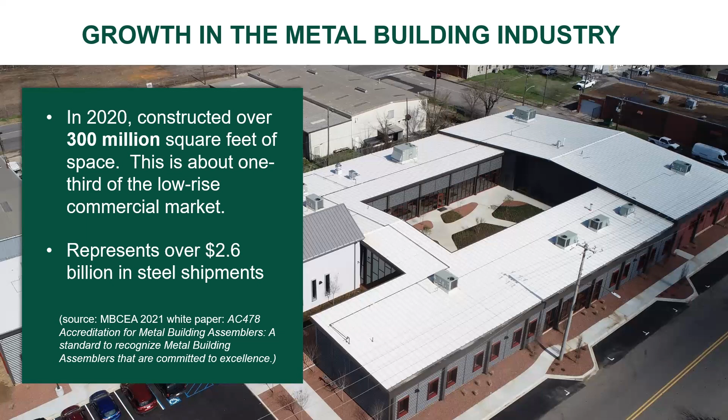So in the past, as we know, metal buildings were relegated to construction of things like warehouses and airplane hangars. But today, due to lower costs, energy efficiency, sustainability efforts, and design innovations, metal buildings are trending everywhere, from car dealerships, schools, churches, strip malls, you name it.

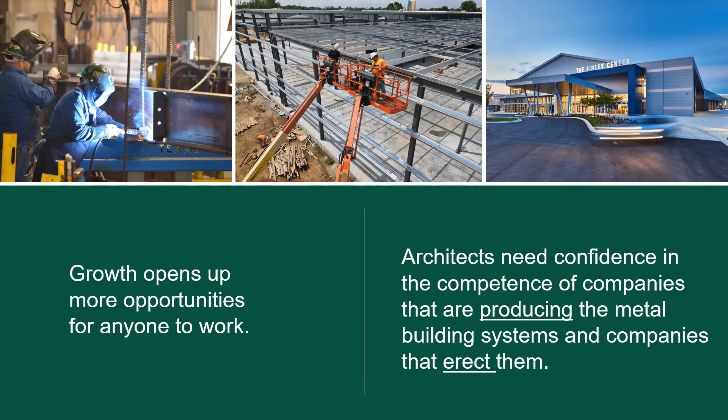This growth has really opened up more opportunities for anybody to come and participate in this work. You, as architects, need the confidence in the competence of these companies that are producing the metal building systems and the companies that are erecting them as well. This is where accreditation comes in, because accreditation will ensure that the metal building construction industry has a high standard of best practices that promote safety, training, quality, and consistency for the manufacture and assembly of the metal building systems.

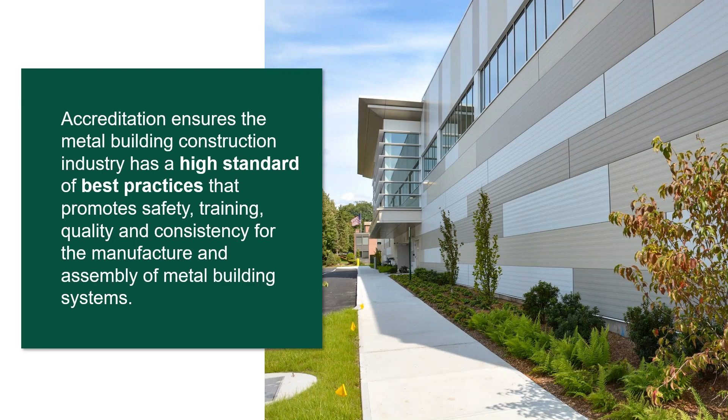The metal building industry has worked with the leading US accreditation body, International Accreditation Service, IAS, to develop a system which includes these 2 accreditation programs we're going to be talking about today. These 2 programs are really what sets the bar and independently verifies the competence of these companies.

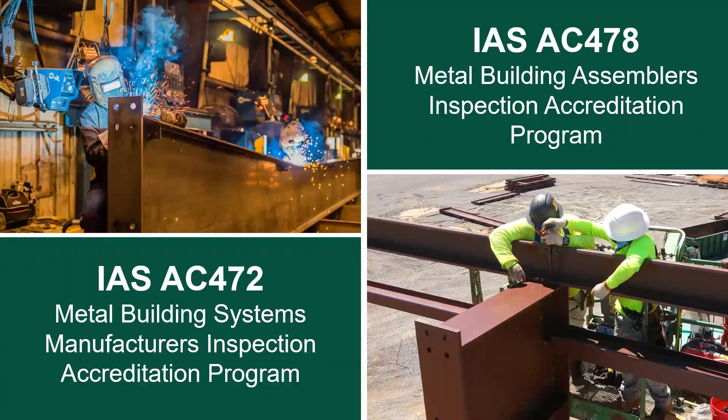The first accreditation program we're going to be talking about today is AC472, and it's for companies that design and manufacture the metal building systems. The second accreditation program we're going to be talking about, AC478, is for companies that construct and erect or assemble the metal buildings themselves. So a little bit of background about us, IAS.

IAS is an independent, nonprofit, internationally recognized accreditation body that is regularly evaluated for compliance with international standards by peer accrediting organizations worldwide. We have over 18 accreditation areas, everything ranging from testing labs, inspection agencies, fabricators, metal building manufacturers, metal building assemblers, and many others.

IAS must comply and operate to the requirements of ISO/IEC standard 17011. This 17011 standard specifies requirements for the competence, consistent operation, and impartiality of accreditation bodies assessing and accrediting conformity assessment bodies.

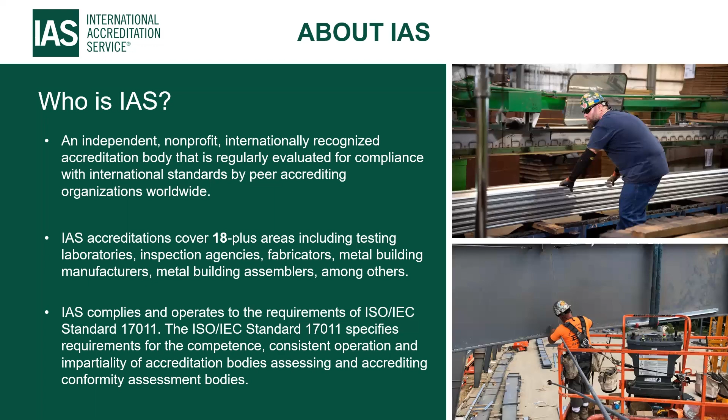IAS is also a 501c registered body and a wholly owned subsidiary of the International Code Council known as ICC. I'm sure many of you are already familiar with ICC because they are the leading global source of model codes and standards and building safety solutions that include everything from product evaluation, accreditation, technology, training, certification. These ICC codes, standards, and solutions are used to ensure safe, affordable, and sustainable communities and buildings worldwide.

They're also a nonprofit professional organization and a leader in the building construction industry worldwide with over 64,000 members. So most US communities and many global markets choose the international codes because they've provided the highest level of safety in the world for more than 90 years. And nearly 2 billion people worldwide are impacted by ICC's building safety codes.

So what is accreditation? To give you a little bit of a background, accreditation is defined as the independent third-party assessment of an organization against recognized standards to determine if their processes or services comply with the requirements of that standard. IAS accreditation is used by organizations to improve the quality and technical capability of their services.

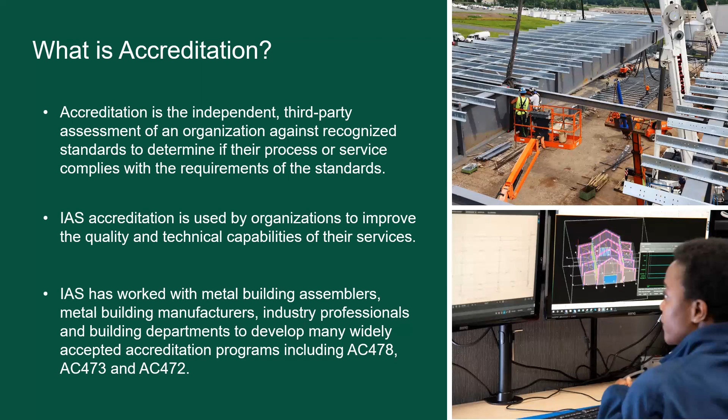IAS has worked with metal building assemblers, metal building manufacturers, industry professionals, and building departments to develop many widely accepted accreditation programs, including AC478, AC473, and AC472. Accreditation with IAS is recognized by federal, state, and local governmental bodies.

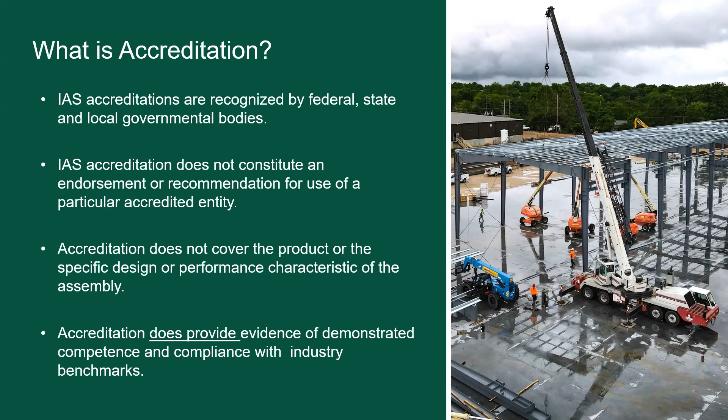What IAS accreditation does not constitute is an endorsement or recommendation for use of a particular accredited entity. Accreditation also does not cover the product or the specific design or the performance or the characteristic of the assembly. What accreditation does provide is evidence of demonstrated competence and compliance with industry benchmarks. And at this point, I'm going to go ahead and turn it over to Walter, who's going to talk about the accreditation criteria. Thank you, Laura, and welcome everyone.

The accreditation criteria, as Laura defined, we developed for each IAS program separately, and it provides guidelines for implementing performance. So when we do an assessment of an organization, whether it be a manufacturer or an assembler, there are several guidelines that are required, and when we come in and do the assessment, we're looking to verify that the organization is following those guidelines and implementing to perform to meet the codes, as well as provide a quality product to the customer.

So IAS assessors use this accreditation criteria, and they're different for each program, but the reference codes and standards that the applicants are seeking accreditation to, we've developed and adopted these through public hearings. And actually, IAS is right now in the process next month of having one of these, where changes get made to these accreditation programs based on somebody wanting to modify something or change it. It goes through this hearing and it gets voted on, and it either gets passed or changed, or it gets rejected and needs further research to see if it really needs to be applied or not. Next screen.

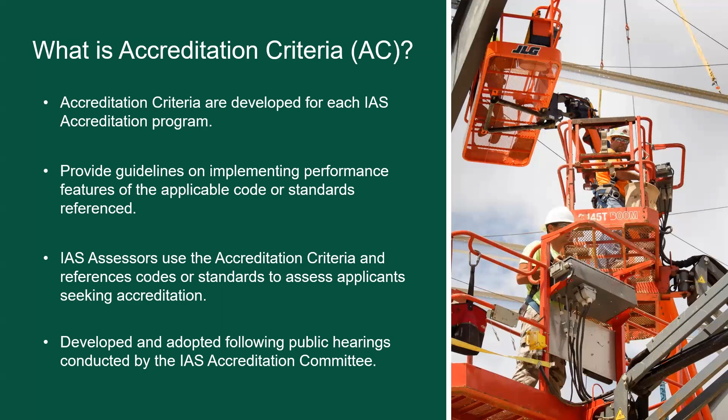So the first one we're going to talk about, as Laura mentioned, is AC472, and this is for the metal building manufacturing organizations, where they actually fabricate from plate or cold form materials to the finished product to ship and be assembled by the AC478 groups. Next screen.

A little bit more about IAS. It's an international accreditation service, and it's a subsidiary of ICC, who produces and maintains all the building codes and requirements throughout the country. And they're based in Chicago, and IAS is a subsidiary of ICC.

The AC472 program was worked together for some time with MBMA, who's the Metal Building Manufacturers Association. Back in around 2000, the same program was followed through with AISC, and in the back of the old steel manuals, there was a quality program for metal building manufacturers. And that's where this started.

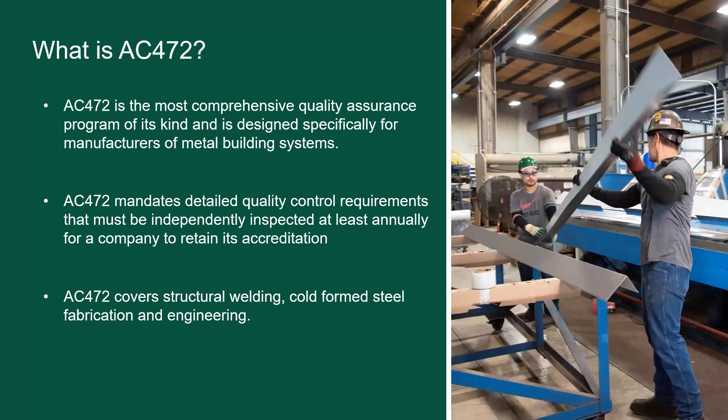Accreditation programs for manufacturers operate under a documented management system. It's clearly defined what is required and how you have to satisfy and meet these requirements. IAS as an agency conducts a yearly inspection. It's indicated to be unannounced, but in reality, they're announced a couple weeks in advance just so that the assessor doesn't get to the manufacturing facility and everyone's on vacation or out of the office.

So they do know we're coming, as well as there's a management system that the manufacturer has documented that tells the assessor how they do things, how they follow the procedures, how they document them, how they keep records. And this procedure or quality manual tells us how they do it, so we know what they're supposed to be having as far as record keeping and documentation.

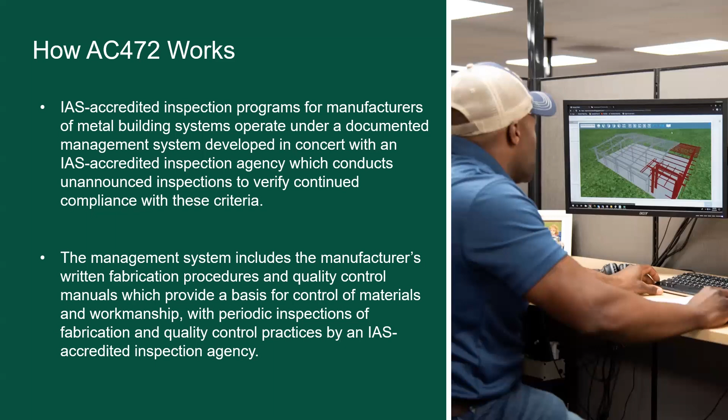As well as IAS doing this assessment on a yearly basis, they also have to hire a third-party inspection agency that comes in twice a year and inspects their work and documentation and record keeping. So they actually get assessed 3 times a year, once by IAS and twice by the third party. What are we looking for?

Order documentation. The metal building manufacturer gets an order, usually from a builder or an erector that's buying it for a customer. So they tell the manufacturer what they want: building size, width, length, eave height, roof slopes, canopies, facades, whatever else they're wanting, panels, what kind of panels, insulated or just plain, and insulation.

Design and detailing to ensure that the code requirements through engineering are maintained. Engineers have training records, they've got education, they have programs that are designed and used properly. The raw material that's being used is required to be traced for type and grade to ensure that the product is being made from the right material.

Quality assurance programs and staff are licensed engineers and certified welders and inspectors. So every organization has to have a certified welding inspector within the organization that is checking 100% of the welding, and the licensed engineers are licensed in the states where the projects are going so that they can sign and seal them to ensure that they're done properly.

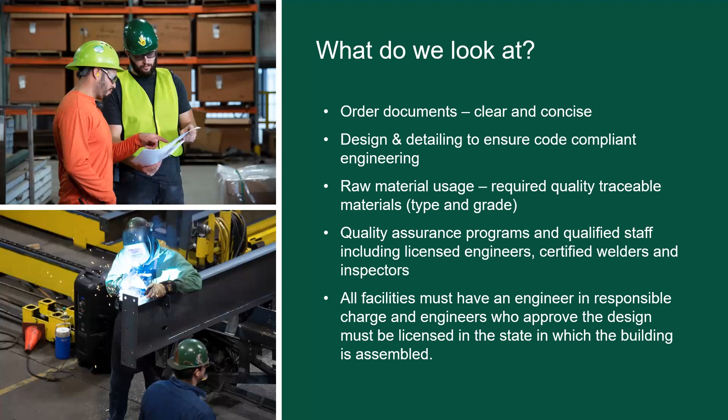And in addition to that, there is an engineer in responsible charge, and they'll have several engineers, both licensed and unlicensed, that are designing jobs, and they're all getting approved through a licensed engineer for the state in which the building is being assembled. Next screen.

The benefits to the architects. The architect and owner have confidence that the building's adhering to the most comprehensive quality assurance program, and that it's being done properly with people that are trained, with the knowledge and experience, as well as the procedures being followed and traced, and can verify that it is being done properly by the right people.

Each accredited manufacturer's got to demonstrate specific and detailed quality control requirements, documented. We do not accept, well, that's the way we do it. It's got to have evidence that it is actually being done during these assessments. And so we're verifying that there's procedures and documentation that says, here's what we do. And then there's documentation that says, this is proof we've done it that way. Next screen.

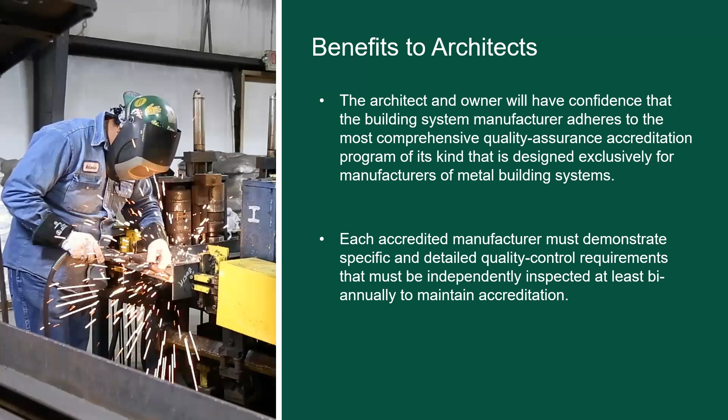Again, more benefits. The AC472 provides an extra level of assurance that your building's supplier, engineering, order, design are all being checked and have a high quality of standard, and are evaluated by IAS as well as the third-party inspection agency. Building officials can deem AC472 accredited manufacturers as approved fabricators as defined in Chapter 17.

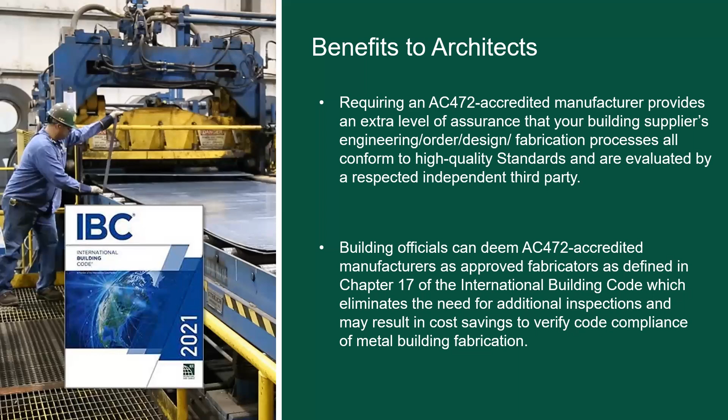This allows the building officials to accept AC472 as a manufacturing organization that's accredited. They can allow this to handle the requirements of being inspected for every job going through every facility. They take our AC472 accreditation and say, okay, we don't have to come in and bother every manufacturing facility for every project. We accept the IAS accreditation to cover those requirements. Doesn't mean that they don't have to, but they can allow it to take place.

So allowing only accredited suppliers, part of the criteria as well is that every manufacturer has a list of who they're buying it from, and they evaluate them on a regular basis and document their evaluations. And so we're looking at that when we're in there doing these assessments as well.

It assures that the building components are designed by professional engineers and demonstrate knowledge of building systems and applicable codes. So the codes of the project are verified, the engineers' licenses are verified, and they're sealing these projects and drawings and any calculations that they perform. And they have records of everything that's going out of that facility to ensure that everything has gone through the same steps to be verified that it is a quality product being delivered.

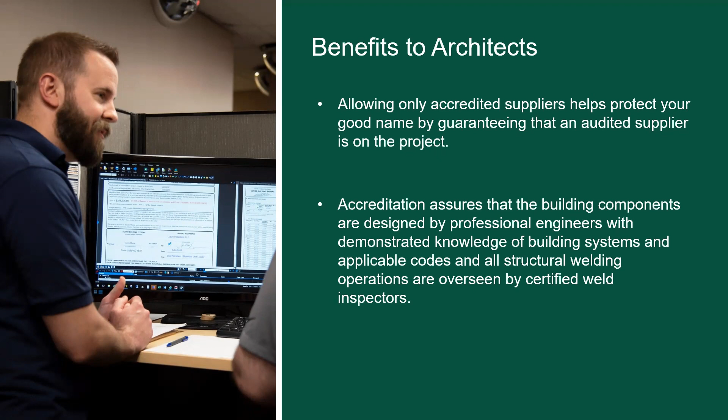And one thing that's been added to this program in the last 3 or 4 years is a procedure for them to be accredited to do ultrasonic testing to meet the criteria of the code. And they have to have all the documentation and record keeping that it's getting done. So when we go into facilities that perform this UT inspection, we're looking for documentation, training, and verifying that the equipment is accurate to be doing the ultrasonic testing.

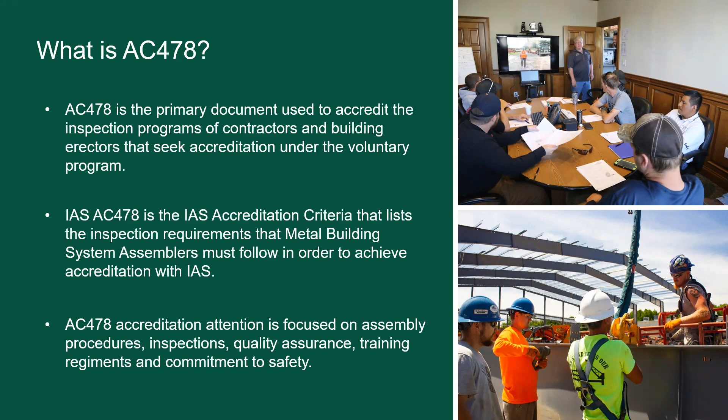It's well known that the lowest bidder awards may lead to cost overruns. Everybody in this industry knows that if you go to the cheapest price, you may not be getting the best quality. In the long run, it's going to cost more. It's just like everything in this world today. So this is trying to stop that from happening, that these organizations are accredited and are producing a quality product, as well as being assembled properly.

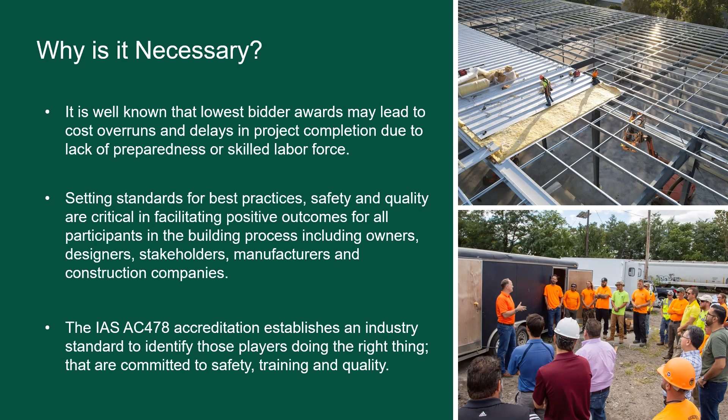It sets the standards for best practices. Safety and quality are critical in facilitating positive outcomes. And IAS 478 accreditation establishes an industry standard to identify those players doing the right thing. That there's safety and training and quality. It's the three biggest departments of this criteria.

What's reviewed? Documented safety and training programs, that all the employees have a safety program that they're following, and they're trained to do the things that they're performing out in the field. Documented management system. It's a manual that the assembler organization puts together to tell us how they ensure that these things are being done, and shows us documented evidence that they actually are occurring.

Job site specific assembly plans. So when they start a job, they have a plan of attack going forward. Where are they going to lay material? How's it going to be laid out? If there is an accident, how do they get to a hospital, or who do they contact? And job safety analysis for every project. It goes over the steps that they're going to follow to ensure safety.

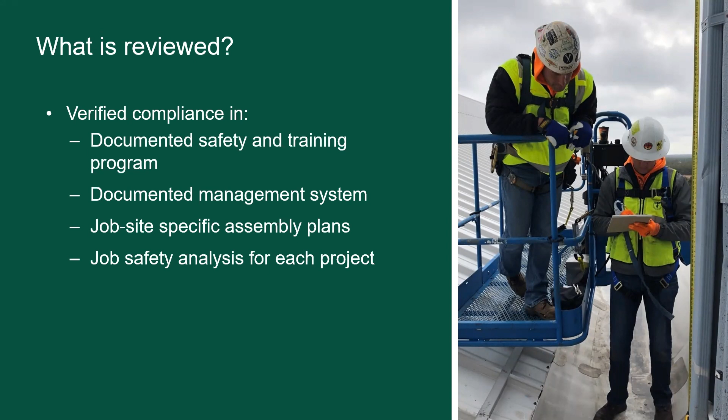The benefits, again: architects, developers, designers, and owners can have a greater confidence when the metal building is assembled at an AC472 manufacturer and erected by an AC478 organization that has followed all the requirements of these criteria: safety, training, quality program, level of assurance. You can make a great product, and if it's put together terrible, it's no better than anything else. And if you know how to put something together, but every piece has to be fixed, it's not going to be a good product at the end of the day for the customer.

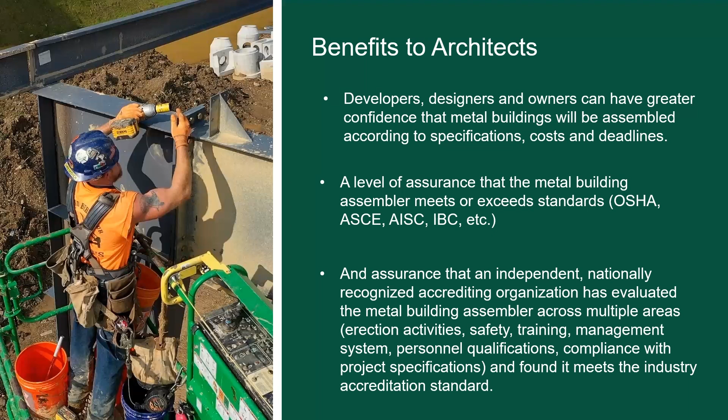So it's an assurance that an independent, nationally recognized accreditation organization has evaluated this assembler across multiple areas of erection, safety, training. And that's what IAS does. They go in and verify that they have a program, they're following it, and they're meeting the criteria. Verification that the assembler has the required insurance coverage. We verify that they are insured to meet the requirements.

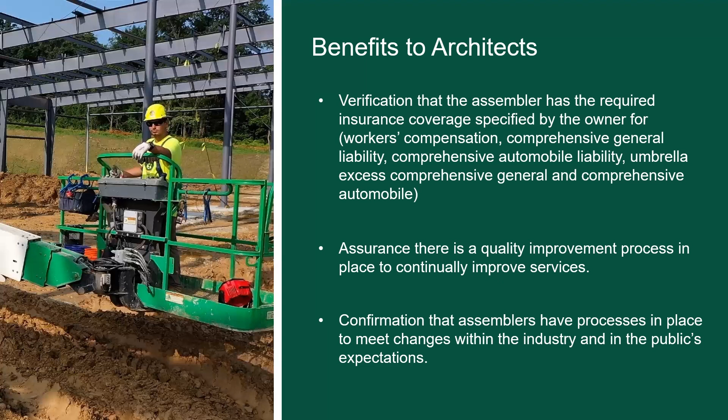Assurance that there's a quality improvement process in place to continually improve services. It's not just a matter of having a quality program, but they have to constantly tweak it to get better, and processes and procedures get revised and changed, to continually improve these services to the customer. And confirmation that assemblers have processes in place to meet the changes within the industry. Again, you're constantly improving your services because there's changes within the industry and the codes that require everybody to keep performing at a better level.

Benefits to the architects: a higher level of confidence, again, in the quality, safety, and services offered by an assembler. Confidence that the assembler has the appropriate protections in place to ensure staff competence and supervision, physical safety, privacy, handling of complaints. There's going to be problems out in the field. It's just going to happen, but they handle them properly, they take care of them, and they document these so that they can look back at them and verify that it's not going to happen again.

And assurance that accredited assemblers subject themselves to an on-site assessment. We don't just go look at their manuals. We actually get to a job site on an assessment and talk to the gentlemen or women that are putting them up, and ask them questions about what they know about the quality program. What are their training records? And we'll ask them for their OSHA certificates.

Just random checks just to make sure that everybody is really doing the right thing. So what is some of the specific language? AC478, again, it is the assembly of metal buildings. We don't get into the high rises and things in this program.

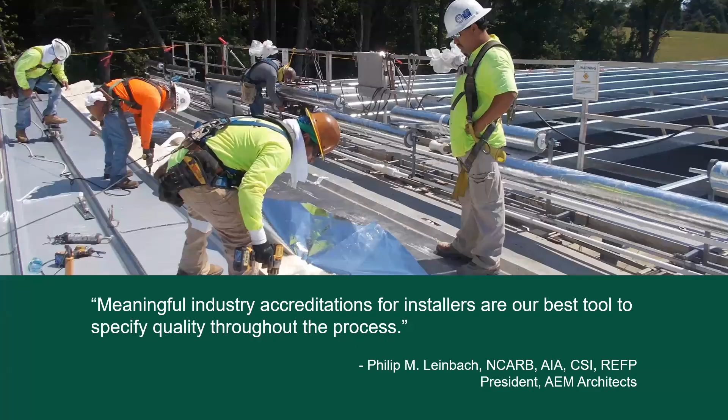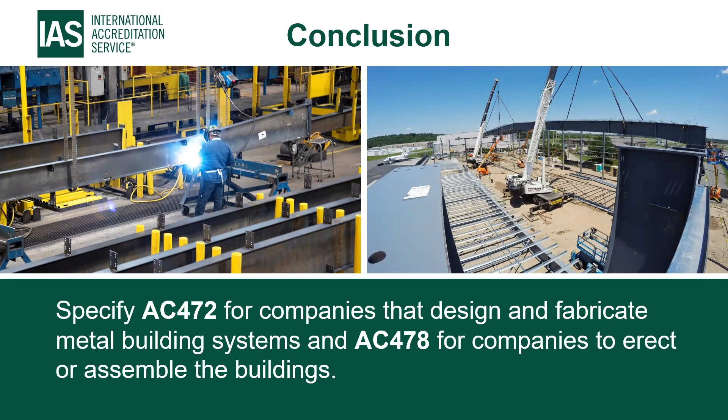Just conclusion, the best thing, from our perspective and in the industry, would be to specify both 472 and 478 in the specifications for the project. That ensures that the company that's designing and fabricating the parts are qualified and accredited, and that the parts and pieces will be assembled in the field by a competent organization from the 478 program.

All right, this is Greg West again, coming back to you. And at this point in the webinar, we'd like to do some Q&A. Walter, thank you so much for your presentation on both programs. And thank you, Laura. We're definitely going to be bringing you in for some of the Q&A here as well. But I also want to bring up Dan Halmy for one of our first questions.

Dan, as I mentioned earlier, you're actually a metal building assembler, Halmy Builders, and your company did get accredited early on. Tell us a little bit about your experience with accreditation, and why did you decide to pursue accreditation? Well, thanks, Greg. Hi, everybody.

So, yeah, as Greg mentioned, I am a contractor, longtime family business. We started doing metal buildings around 2000. We're a general contractor, but we have our own erection crews.